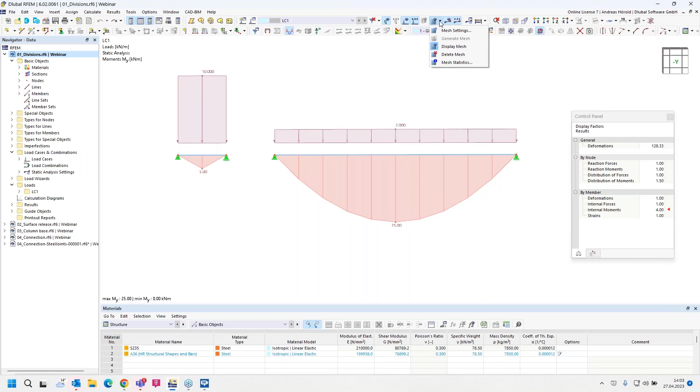The first solution would be to divide the longest member, or increase it. The second possibility is to increase the value for the member divisions in the mesh settings. The mesh settings can be found under Calculate, then Mesh Settings, or in the menu, this button here, then mesh settings.

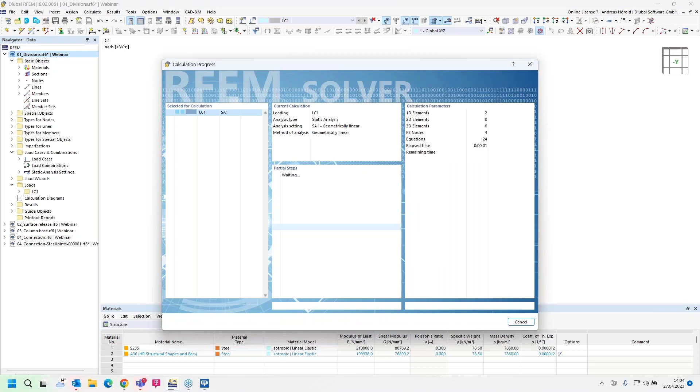For the member, the default setting for the number of divisions for result diagrams is 10. If I increase that, for example, to 50, press OK, apply, and calculate all again, then you can see a curve for the moment, and that display is correct. That was the solution.

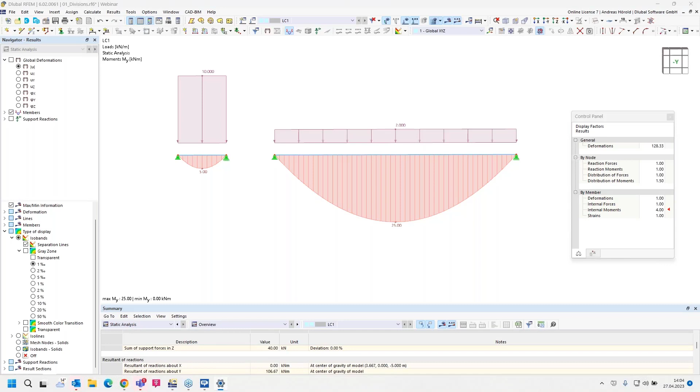The next question is: how can I set a contact condition between two solids? In earlier webinars, we presented special objects like the nodal release and the line releases. In this webinar, I would like to introduce the surface release. It's also possible to create surface releases, and I would like to show that in this example.

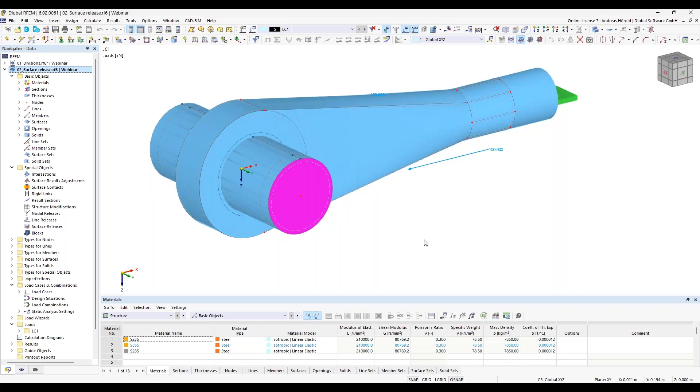This example shows a grommet with a bolt put through that place. The contact conditions here in this area should be defined so that the surfaces under tension can detach from each other. So if I load the bolt here, as we defined, it should be released on that edge here. So how do we do that?

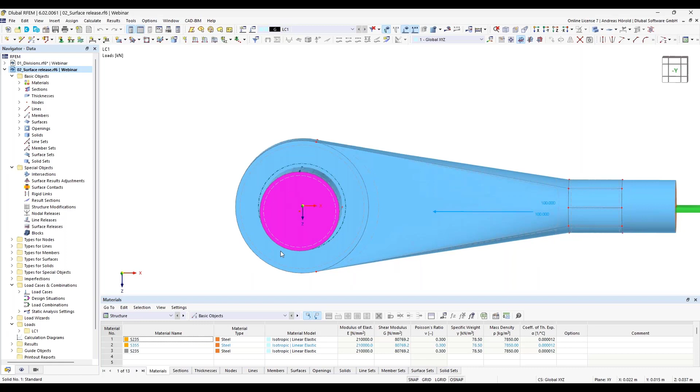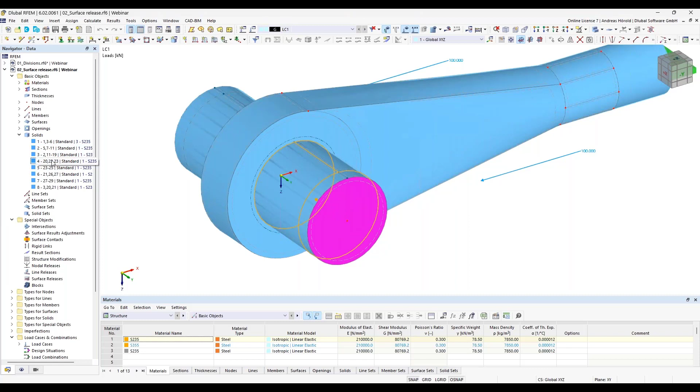Before I do that, I would like to introduce the solids here. On the left side you can see the navigator data, and then you can see the solids - that ring here, this part, and so on. Solids 4, 6, and 8 should be released from the ring here.

Okay, so then I create a new surface release. On the left side, I do a right click and then new surface release.

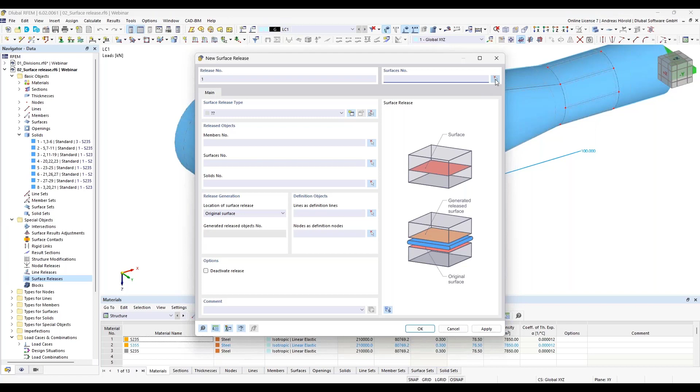At first, I assign the surface. I switch to the transparent model, so that's the surface between the two solids.

Okay, then next, the release type should be defined.

I specify a small spring for the X and Y direction, to avoid numerical problems, so that the bolt can be slipped out from the hole.

So in the Z direction, perpendicular to the surface, I define a nonlinearity fixed if negative PZ. Okay, that's all.

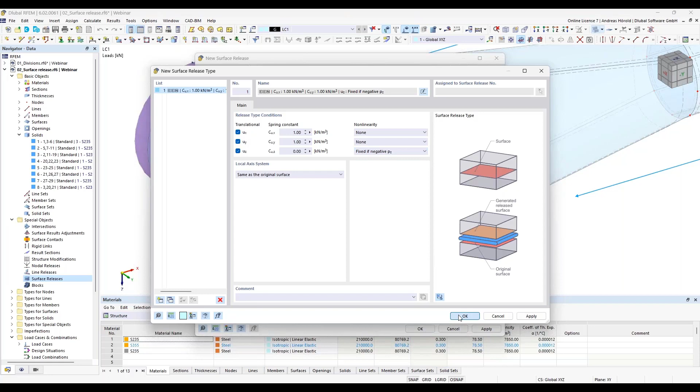So then I select the solids. So I'd move it a little bit.

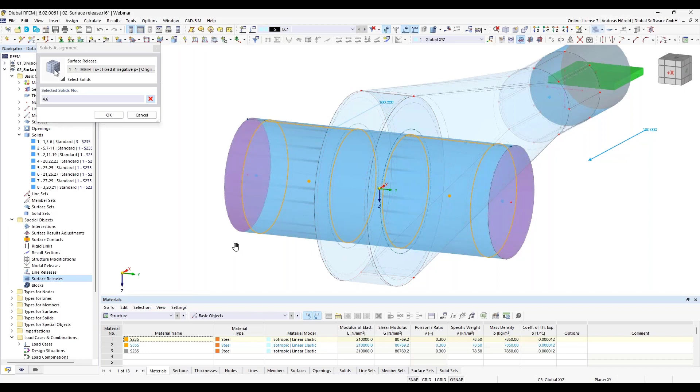Okay, so then number 6, number 4, and here I switch to the wireframe model.

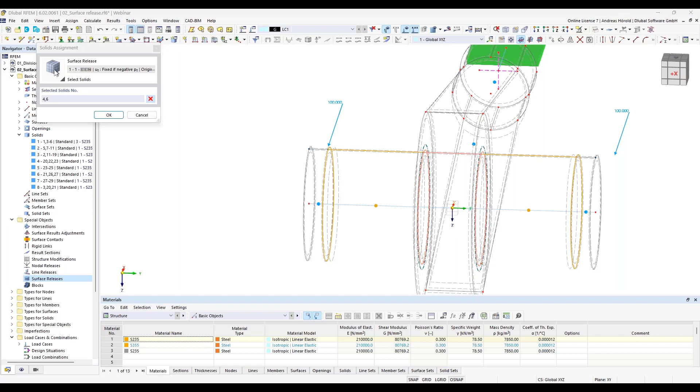One is not correct. There are two solids who have the same center, 8 and 1. I select 8. Okay, and now I've got 4, 6, and 8.

It's also possible to define it directly here: 4, 6, 8. Okay, that's all. I apply that with OK.

And after clicking OK, a note is shown informing about some missing entries, which can be corrected automatically.

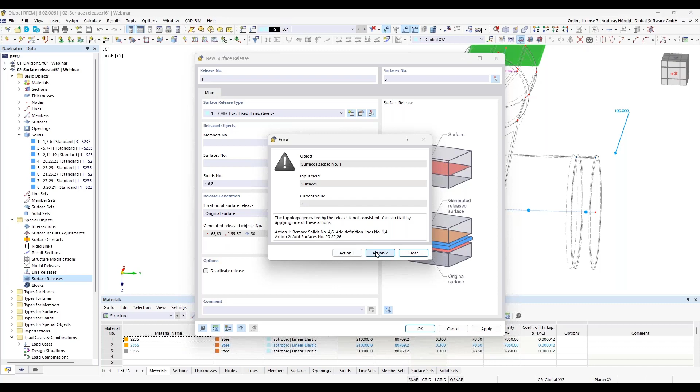So then I select action 2. There are some surfaces that must be released. Okay, so then all should be fixed, and I can calculate all.

So that takes some seconds.

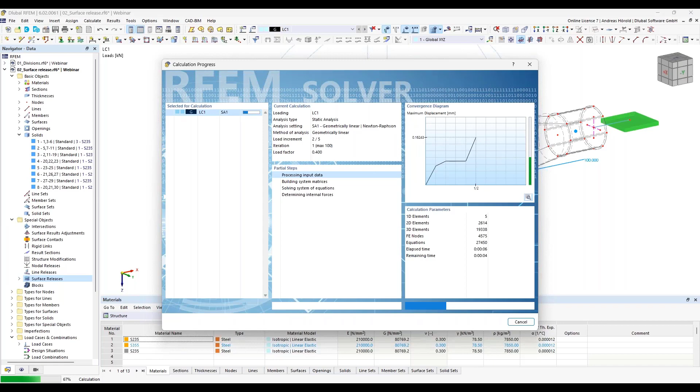And after the calculation, we can see that the solids are detached from each other. So I move, or I display in...

minus Y direction, and can also do an animation. And you can see that the bolt is released from the ring.

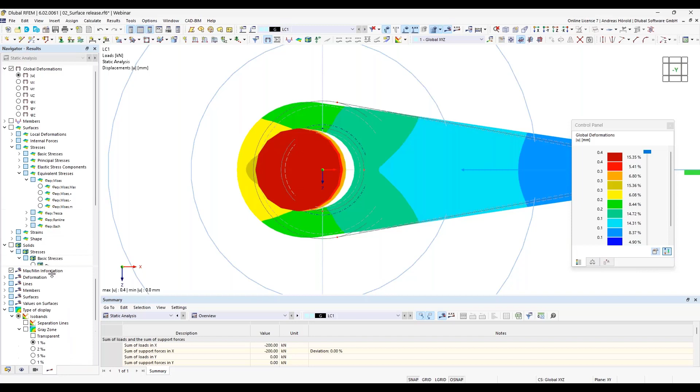We can also check the results for the solid. So solid sigma X, yeah, in that direction here.

You can see there are only compression on that side and also on that side, and no tension.

Yeah, and because the bolt is released from the ring. Okay, that should be all to that question.

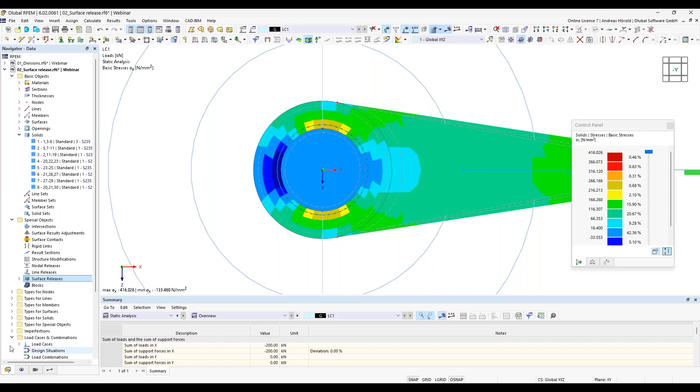I turn back to the first model. And the next question is, unfortunately, I'm not able to move my model by the mouse. Also shifting a node to another grid point does not work anymore. How can I reactivate it?

Okay, what I mean is that I can't move or copy also by drag and drop. And the reason is, you can reactivate it by a right click and then activate the drag and drop function.

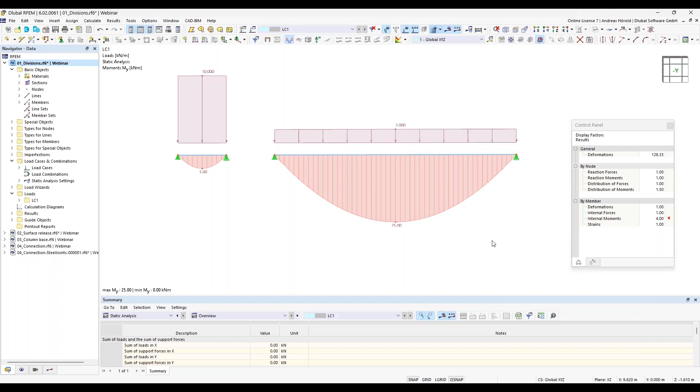Maybe that was by accident activated or deactivated, and now we activate it again.

And then I can move the node. I move the node, for example, or I can copy that by drag and drop, and so on. Okay, that should be all to that question.

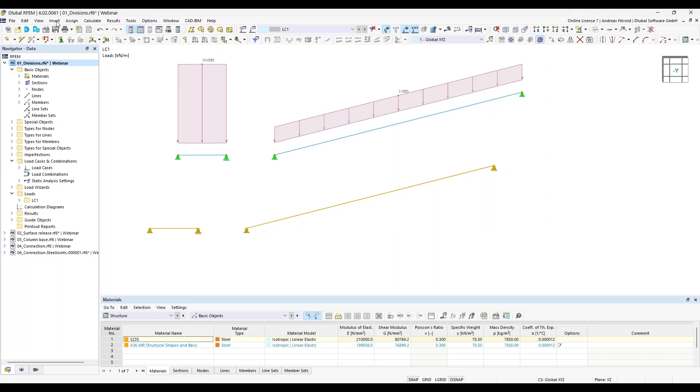We work with that model for the next question. And the next question is, how can I change a cross-section taken from the library concerning its dimensions to a specific value? So let's create a new section.

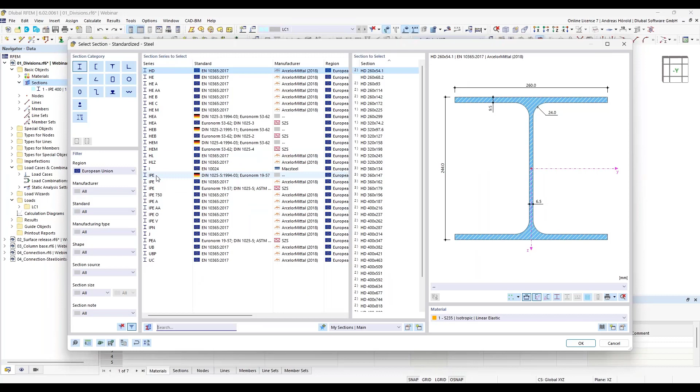I go in the navigator, data for the section, and then I select new section. And I can, for example, choose a section IPE, for example 300. Okay.

So, at the moment, the section type is standardized steel. And if I want to modify the thickness of the web or flange, or the height...

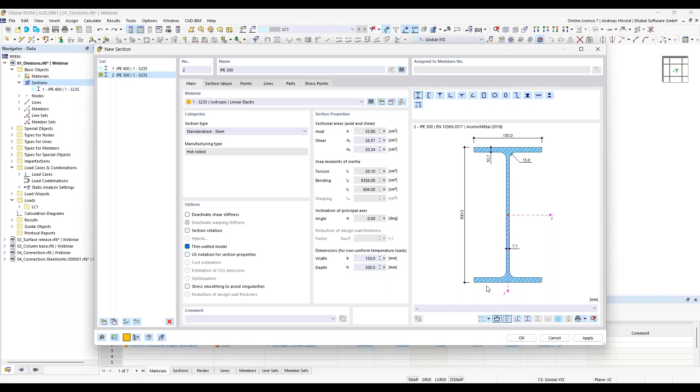or maybe you've got an older cross section that is not standardized anymore, or you've got rusting on the web or the lower flange, and you would like to modify the cross section, then you have to change the section type to parametric thin walled.

So then you can go to the next dialog and change the dimensions. For example, because of rusting, you've got a web only with a thickness of 5 millimeters.

Or it was changed, or you have got a rusting of 2 millimeters on the lower flange.

If you have got it on the upper and lower flange, then you can change it here, or you can also change the type. If you have got different flanges, for example, you can select such a single symmetric section.

And if you want to have got a rusting on the upper and lower side, for example, of 2 millimeters, then I would like to select 8.7.

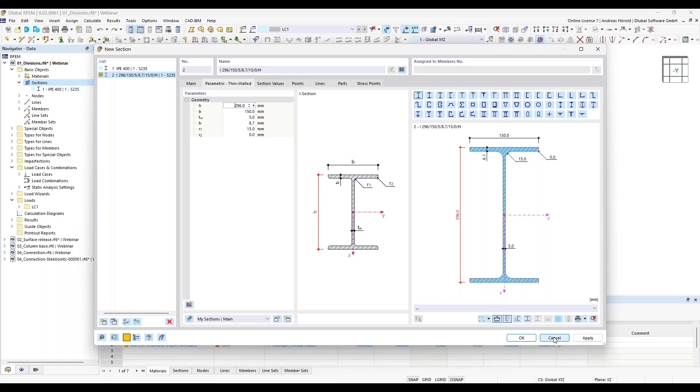And then I have to modify the 300 to 296. Okay. So that's one possibility. And the other possibility, of course, is to use RSECTION, the single or the standalone program, and then you can use that RSECTION cross-section in the RFEM or RSTAB model.

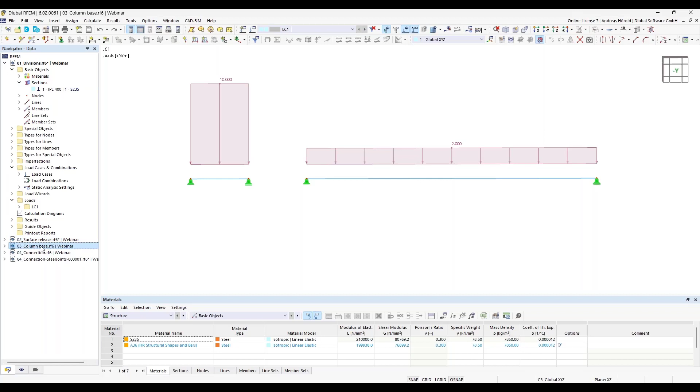Okay, so then we turn to the next model and the next question. And the next question is, I would like to hide my surface results for a certain area around the 0 value. Is there any elegant solution for this in RFEM 6? If only individual areas in a model are decisive for the design, the evaluation based on isobands may quickly become confusing. And you can avoid that with that function here in the navigator results, and then type of display, isobands, and you can check the gray zones.

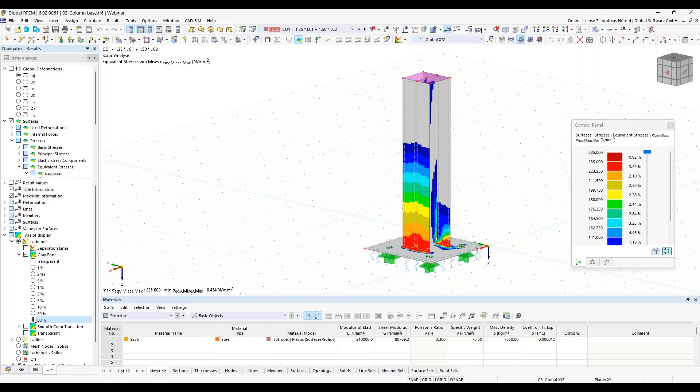So, and below the item, you can select a value between 0.1% and 50% to be covered by the gray area. It is only 0.1%, 1 promille, 1%, and so on. Yeah, I think a good display solution. Okay.

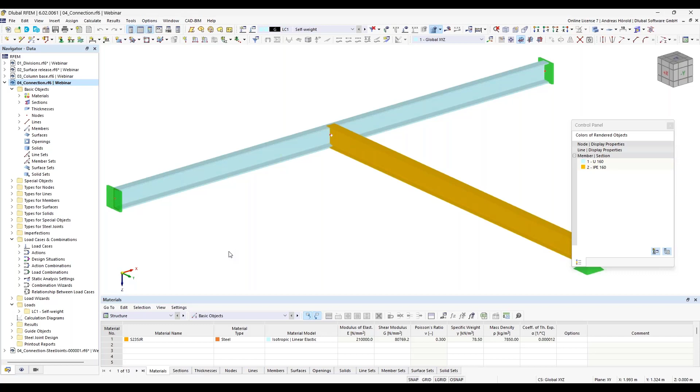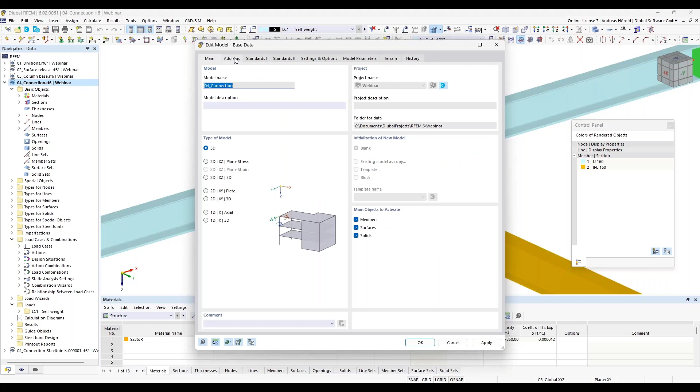Then we turn to the next question and the next model. And the next question is, how can I connect as fast as possible a beam to another beam by a fin plate using the steel joints add-on? Yeah, that's quite easy. First, I have to activate the steel joints add-on in the base data. So left above, I've got the base data, and it's necessary to select or to activate the steel joints add-on. And then under standards 2, you have to choose the standard and the national annex. I leave the standard national annex of the Eurocode 3.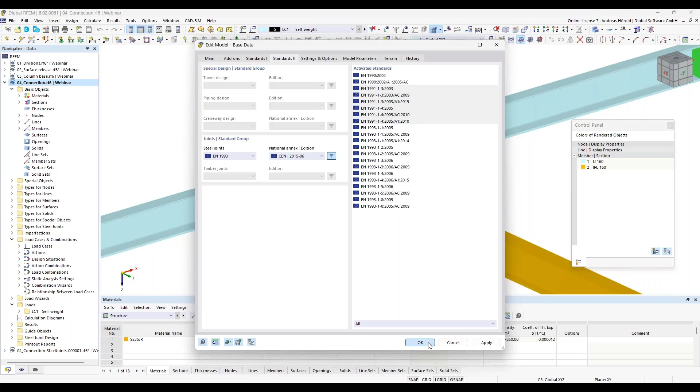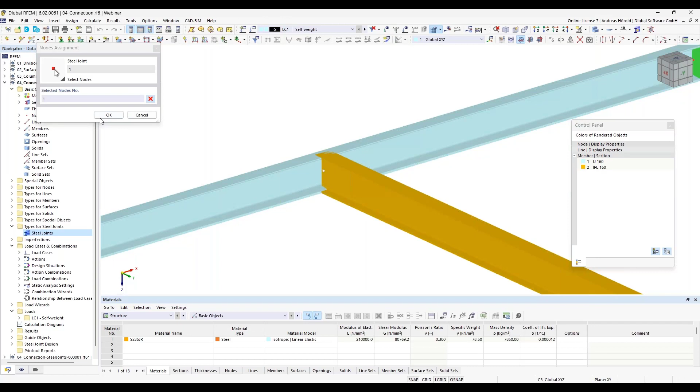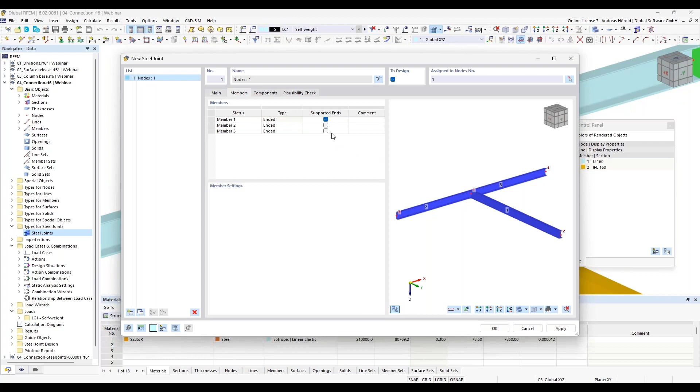Okay. So, and then the types for steel joints is activated, and I can create a new joint by right-click, new steel joint. So, and in the main table, you can define the node to be designed. So, okay. Now all the 3 members are selected. Now we need all the members. And I can select the next step. I have to define the supported ends. I define as supported ends the end of member 1. And member 2 and member 3 are continuous members. So that should be all.

You can also define the material. I use the material that is already defined in RFEM 6, and also the section. So, and then in the components tab, we find all specification for the joint type. And with the insert components from library button, we can choose from various prefabricated categories. Now we've got the rigid connections here, the pinned, the truss, and the bracing. Okay, we would like to use a pinned connection, and you can see the beam to beam connections, beam to column, beam to continuous column, column to beam, and cross joint. We select the category beam to beam.

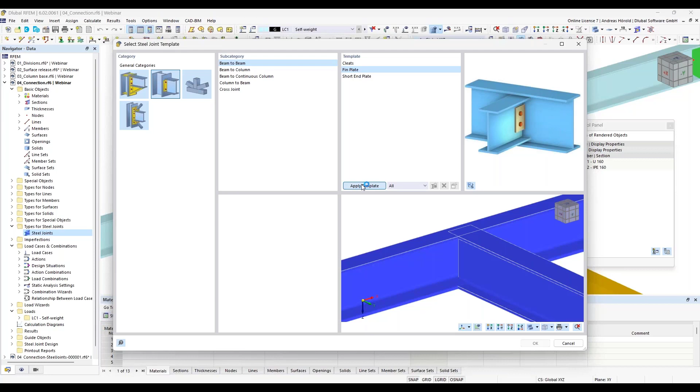Now we won't use the cleat, but the fin plate. Also short end plate is available. So, and if I apply the template, you can see a preview here. Okay, that looks quite good. And I can apply that with OK. So then we can see also the preview here. And we can define the single parameters here. Member 1 is the connected member. Then the reference members in that case are the member number 2 and number 3. That's already correct. Then the connected member offset is parallel. That's okay.

And the connected member offset should be more than 10 millimeters. I select 70 millimeters, and you can see there's no collision or overlapping anymore. Material for the plate is okay. We use the same material, the S235JR. Then the thickness is 10, okay. Alignment, connected member, that's also okay. The position, you can change that from front to rear, if you want. I leave it on the front, and I enter here my -30 for the offsets, -30, and the overlap should be 80. Okay. So, okay.

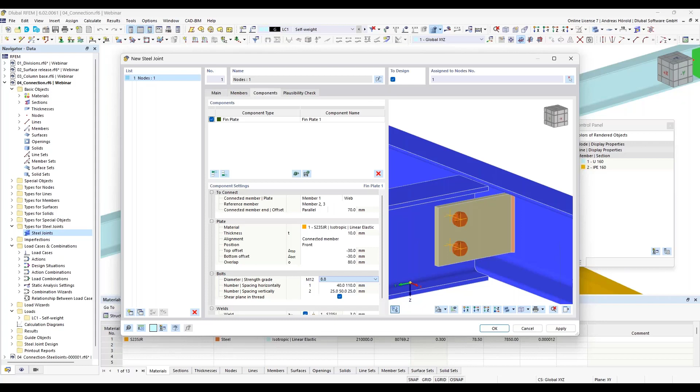So that's okay. Then I have to select the diameter between M12 and M36. All diameters are available. I now select M12 and as the strength grade 8.8. Then you can define the number of bolts.

How many rows, for example, 3, 2, and I select 1 row. And as spacing 40, and the other spacing is calculated automatically. The same is for the spacing vertically. I select 25, and the rest is calculated automatically as well.

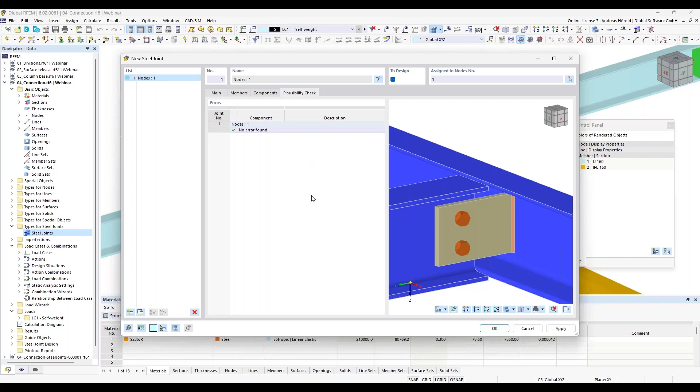Then you can consider that the bolt and the shear plane is in thread. I deactivate it in that case. And for the weld, I leave the 3 millimeters weld. Okay, then you can go to the plausibility check if all is okay. It's all okay now, no errors found, and I can leave the dialog.

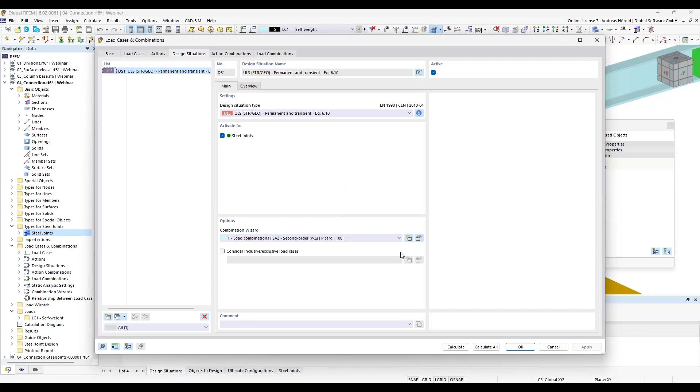And then in the table, I can turn to the steel joint design. I can, for example, double click on the ultimate limit state design situation so that I can check if the steel joints add-on is activated. That's the case. Okay, that should be all. Only one node: objects to design, and I can run the calculation. That should take a short moment.

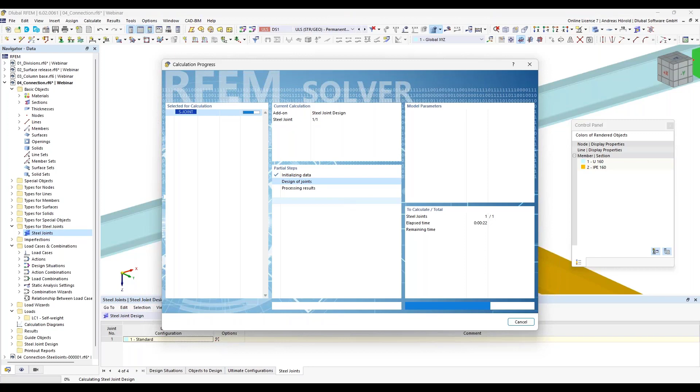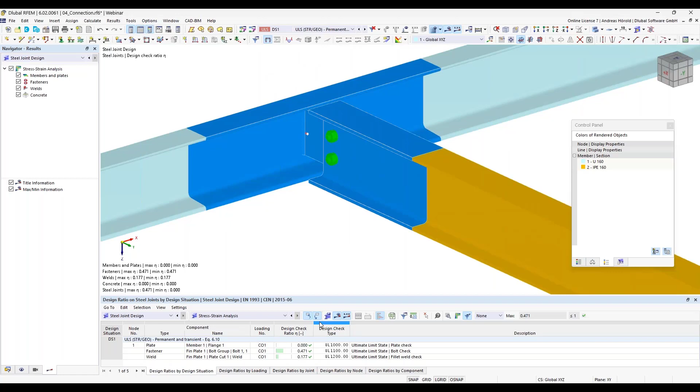So in the background, there's a model created, and the members are then surfaces in the area of the connection. I can show that later. The model is why the calculation takes some time, but I think it's not too long. Okay. You can see the design ratios in the table.

And if I, for example, double click on that line here, or I can go to that button here, design check details. There are two possibilities. Then I can see the design details with the single design checks. Here on the right side, you can see the formulas or equations from the standard, and you can see from which standard and which part the formula is. That's the design for the fasteners, that's for the plate, and that's the design for the weld.

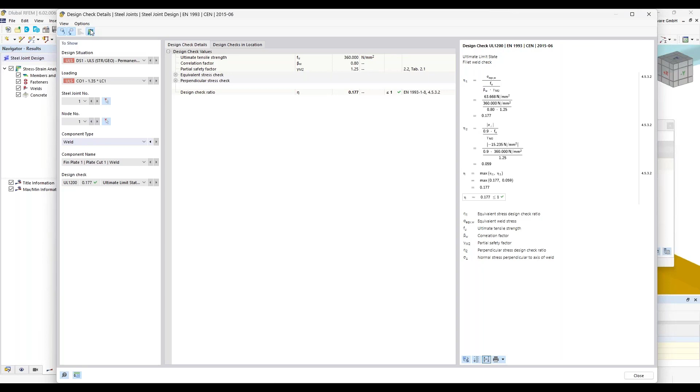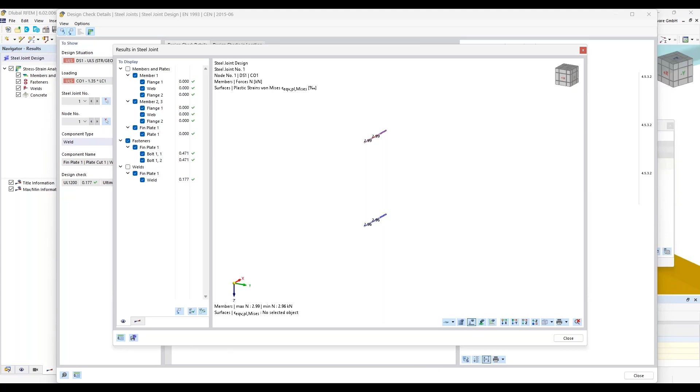Okay. And when clicking here left above the colored joint icon, you can also display the results of the joint model. Now you can deactivate some parts if you only want to see the bolts and so on. And if you click on the button on the left side, at the top and at the bottom, you can save a steel joint model. I already did that and would like to show you that model.

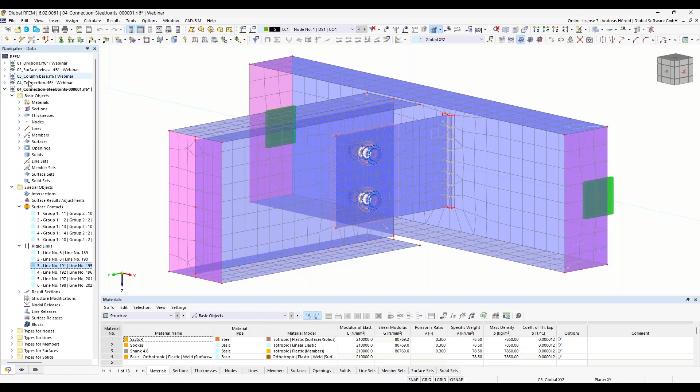So, that's the detailed model with all the results. I disable the results so that you can see the model, and you can see the different objects, for example, surface contacts, rigid links for the welds and so on. And that's the model calculated in the background, and you can see the results in the original model. And now I will turn back to the original model. Just a moment. Okay.